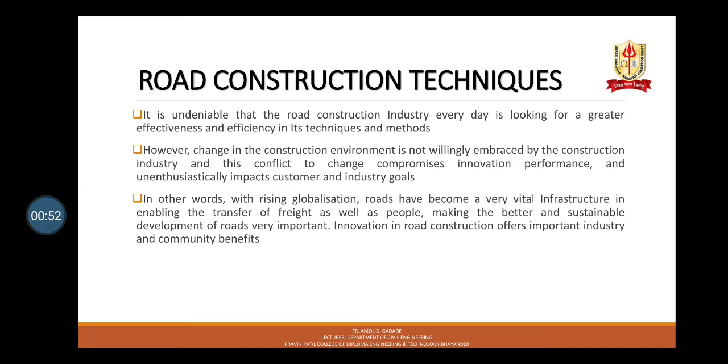Starting with various road technologies, the first one is 3D printing. The idea of 3D printing of structures, although still novel to many, is striding its way towards the root of the construction industry. Today, 3D printers are being developed to process all kinds of construction material and are being tested and tinkered with every day for refinement. Just the thought of an immense reduction in project span and cost with 3D printing technology has been keeping everyone on their toes.

3D printing, also known as additive manufacturing or contour crafting, holds great potential in the industry compared to conventional methods of construction. The printing process, to explain simply, involves feeding relevant data like maps, plans, blueprints, and dimensions in an orderly and predefined way to an automated machine, which in turn produces a precise physical output.

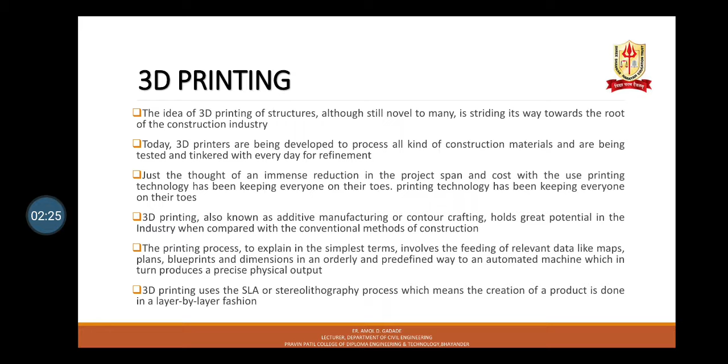3D printing uses the SLA, or stereolithography, process, which means the creation of a product is done in a layer-by-layer fashion. Building elements like walls, beams, and vertical support structures can be 3D printed right at the site, whereas other elements like doors, windows, electrical and plumbing systems are installed with the help of conventional methods.

This is how the 3D printing method works. Process of 3D printing in construction.

A blueprint is prepared with the help of CAD software with all necessary details in it. Since this is going to be the final design and the output is based on it, precision of details is pivotal. The CAD file prepared is then converted into the STL, or standard tessellation language extension, which is compatible with the printer. This extension was first used in stereolithography in the year 1987.

The orientation of the design and the printer is adjusted, just as we do when using a 2D printer. Once set up, the cartridges are filled with the requisite powders and binders for the production of the structure.

The printer, when given the command, starts creating the product, gradually building up the structure one microscopic layer at a time. The thickness of the paste extruded by the nozzle can be varied depending on the structure being printed. A typical layer is around 0.1 mm in thickness.

While the machine is laying the paste, no intrusion is required. The printer simply keeps layering until the job is complete. Periodic checks are all that's required to ensure everything is alright. The time period required for completion can range from several hours to days, depending on the size and complexity of the structure.

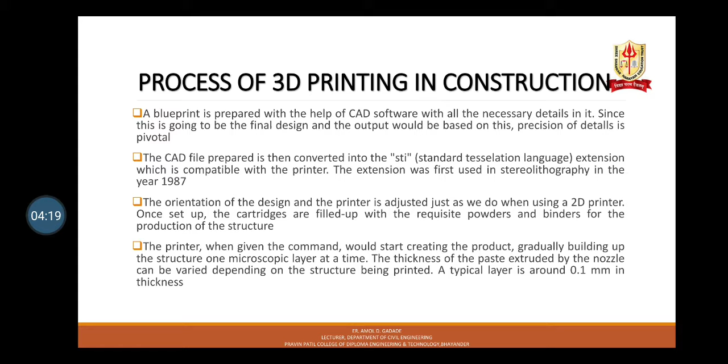Here are some benefits of 3D printing. The very first one is quicker construction. While construction through conventional methods can take months and years to complete a piece of work, 3D printing can wrap up the same piece of work within days.

Second is improved efficiency. Since 3D printing is an additive method, material is added to create the final product, contrary to manufacturing processes such as CNC machining, which are subtractive and leave out a lot of scrap and wastage.

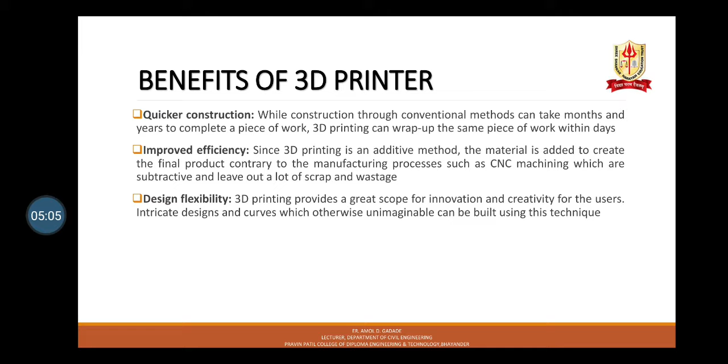Third is design flexibility. 3D printing provides great scope for innovation and creativity for users. Intricate designs and curves, which are otherwise unimaginable, can be built using these techniques.

Another technique is the 3D road printer. Brick roads have been around us for centuries. They are both durable and a treat for the eyes, and easy to produce and reuse. Cement pavers last a very long time and are easy to repair and replace. But nowadays they are difficult to find because building them is an arduous and back-breaking task.

Engineers are always busy finding solutions to problems around the world and strive to decrease the time consumption to complete a task. One such endeavor has resulted in a machinery which is more than just a symbol of great engineering—it is both cool and awesome: the Tiger Stone.

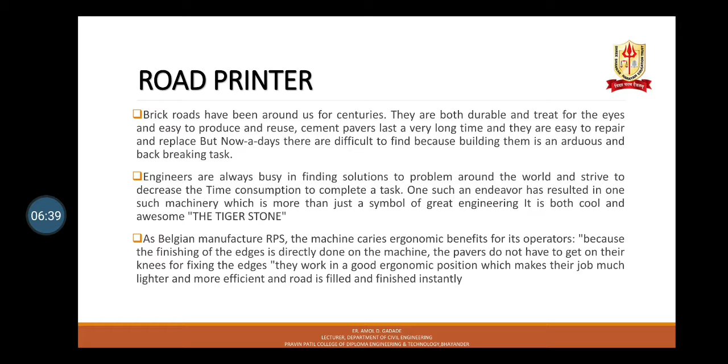As a Belgium-manufactured machine, the Tiger Stone carries an ergonomic benefit for its operators because the finishing of the edges is done directly on the machine. The pavers do not have to get on their knees for fixing the edges. They work in a good ergonomic position, which makes their jobs much lighter and more efficient, and the road is filled and finished instantly.

This is how the road printer machine is working.

Talking about the machine, the Tiger Stone is a 6 meter wide machine that can repave an entire street at once, including edges. The device is amazingly simple to handle - any person can work with it within 5 minutes. Naturally, the stones fall on the road directly into the appropriate pattern. The Tiger Stone is the solution for the heavy work that street pavers in Holland usually have to do manually.

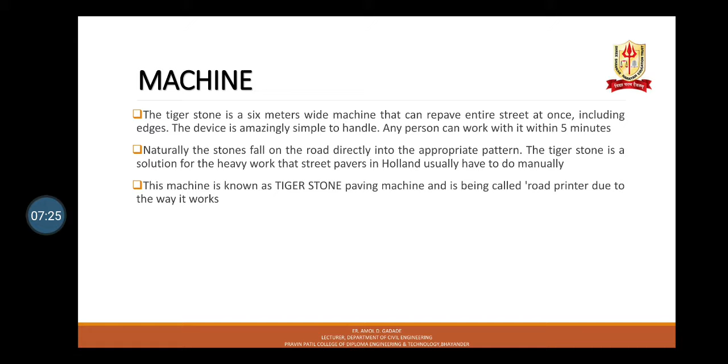This machine is known as the Tiger Stone paving machine and is called a road printer due to the way it works. Talking about procedure, the RPS6 road printer is a divisible paving machine capable of laying bricks for roads.

As the machine rolls backwards, gravity brings the bricks flat to rest on the ground. A front loader fills the brick hopper with loose bricks. The bricklayers stand on the machine and assemble the pattern vertically. The Tiger Stone requires 1 to 3 operators on its platform to provide the machine's pusher slot with loose bricks from the hopper.

The green machine runs entirely on electricity, moving at a speed of 13 feet per minute. Paving stones are lowered smoothly via a curved ramp into place in the correct pattern. It self-steers to keep the road straight and in place.

Then a tamper or steamroller pushes the bricks down to secure them in place. Brick roads are experiencing a revival because they can be reused easily, and filter water without expanding ice.

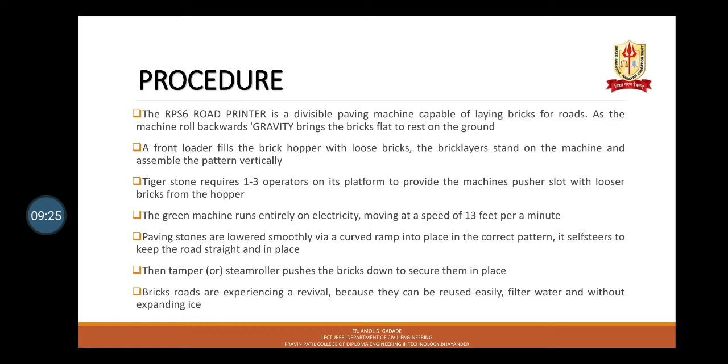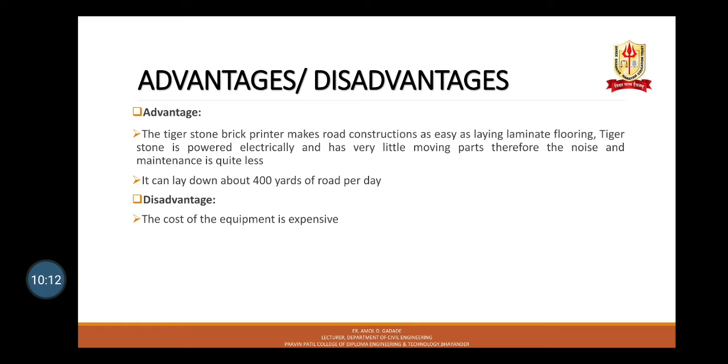Further moving towards smart roads. Smart roads is a term for the number of different ways technologies are incorporated into roads for improving the operation of connected and autonomous vehicles, traffic lights and street lighting, and for monitoring the condition of the road, traffic levels and speed of vehicles. Intelligent transportation system usually refers to the use of information and communication technologies rather than innovation in the construction of roadways, in the field of road transport including infrastructure, vehicles and users, and in traffic management and mobility management, as well as for interfaces with other modes of transport.

Vehicle and highway automation is believed to reduce the risk of accidents, improve safety, increase capacity, reduce fuel consumption, and enhance overall comfort and performance for drivers. There has been enough reason to assume that more automated automobiles relieve the driver from many undesirable routine driving tasks. It has also been known that many car accidents are due to human errors. Therefore, the conclusion has been that with robust automated systems, the chance of car accidents can be reduced.

With the overwhelming increase in the number of vehicles on the road, another concern has been road capacity. Some kinds of automation that would help safety and increase traffic flow have been considered as one potential solution to congested highways. A smoother cruise with an automated system can reduce fuel consumption and engine wear.

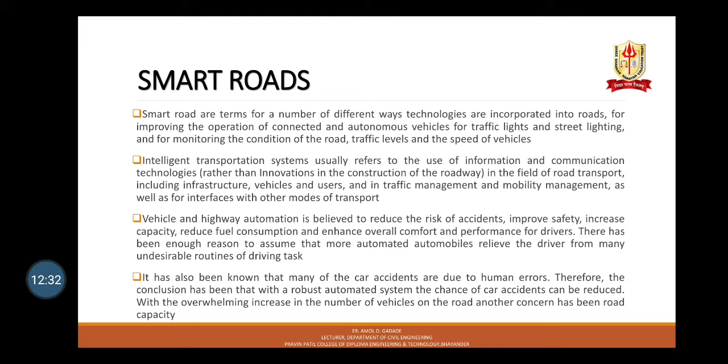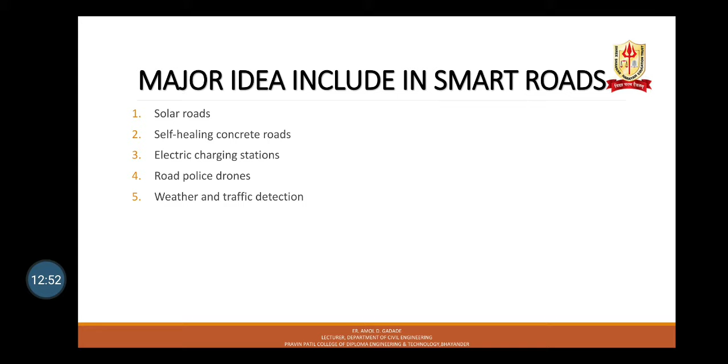Major ideas included in smart roads are solar roads, self-healing concrete roads, electric charging stations, road police drones, and weather and traffic detection. Other functional road panels have been proposed, including panels that could include LED lights for creating dynamic road markings, for example, lane marking or warning messages such as reduce speed.

The panels could include heating elements that produce sufficient energy to clear ice and snow from the roadway. The panels could also include wireless charging technology to recharge the batteries of electric vehicles that drive over the panels.

Now moving towards coastal construction techniques, which is the third part of your chapter. The coastal technologies in the inventory have been structured according to the components of the building: wall technologies, roof technologies, construction systems, flooring, and energy systems.

The inventory includes both alternate materials and technologies that offer benefits in terms of environment and economics while maintaining efficiency and quality parameters. The technologies have been chosen based on key parameters: reduced embodied energy and fuel consumption, hence reduced carbon emission; reduced environmental damage through optimal resource use and waste utilization; better thermal efficiency and comfort; resistance to natural disaster; alignment to local production in terms of material and skill availability; and cost efficiency.

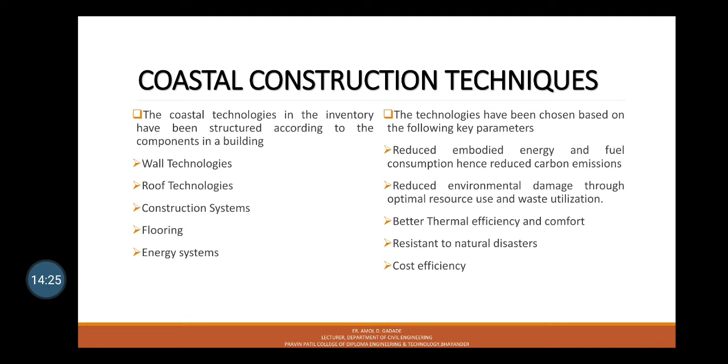Moving further to soundproofing walls. For soundproof and fireproof inner walls of a type comprising two parallel reinforcing metal plates mechanically interconnected to form an interspace between them, with a filler of insulating material consisting essentially of rock wool-like material arranged in the interspace.

At least one continuous diaphragm extends parallel to the reinforcing metal plates and divides the filler into parallel layers. The diaphragm comprises a plate of solid refractory material having projecting edges beyond the filler. The reinforcing metal plates have folded edges constituting a section member-like portion thereof. The projecting edges engage with the folded edges of the metal plates, which are seam folded and hold the metal plates together.

Soundproofing material can be applied to a wall under construction or added to an existing wall post-construction. There are several ways to soundproof a wall. Improvements in the soundproofing industry have resulted in products that are more effective and cost less than traditional wall soundproofing methods. In almost every way, the modern drywall-over-studs wall is better than its timber, masonry, plaster, and lath predecessors—it is fast and easy to build, lightweight, and uses the most inexpensive materials. But when it comes to stopping sound, the modern wall is a flop.

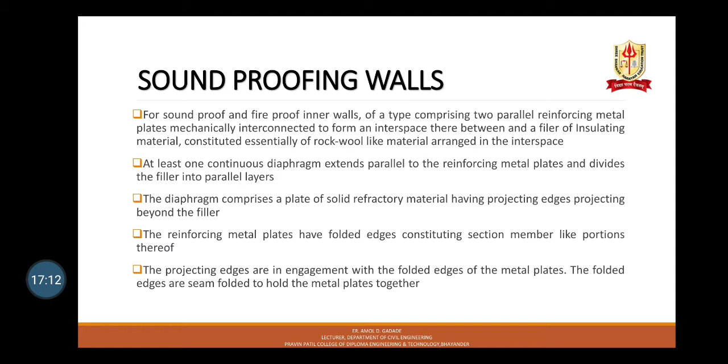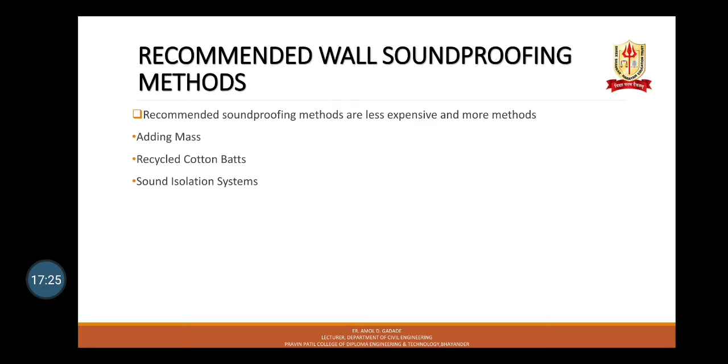This is how soundproofing walls are constructed. Here are some recommended walls and soundproofing methods: the first one is adding mass, the second one is recycled cotton batts, and the third one is sound isolation system.

And these are some traditional and less effective methods which have been used since ancient times: staggered stud wall, double wall, resilient channel system, fiberglass batts, and expanded foam sprays.

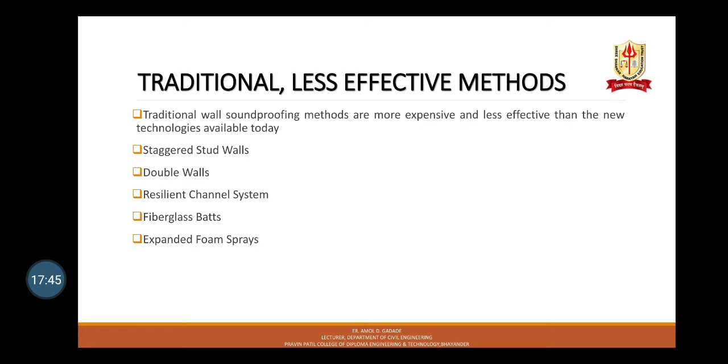The next coastal construction technique is water resistant roof. Waterproofing requires you to block moisture out by using techniques to seal your roof against water. If you have a low slope roof, or one with many architectural elements such as multiple gables and valleys, waterproofing may be necessary. A roof with a low slope may not shed water efficiently and may experience pooled or standing water for a period of time.

Water will always seek to run downward. If there is an opening, it will get through and create water damage to anything underneath the roof, from the decking and insulation to the building contents. If water gets trapped in the end lap or the purlin, it can cause premature corrosion in the secondary framing members of the panel.

A roof with a slope of less than 3:12 is generally considered to have a low slope. If there are panels or areas of the roof that are slightly lower than the surrounding material, it will hold standing water. Other places water sneaks in are through exposed fasteners and nesting panels, which may experience weakening, drawing water underneath the edges.

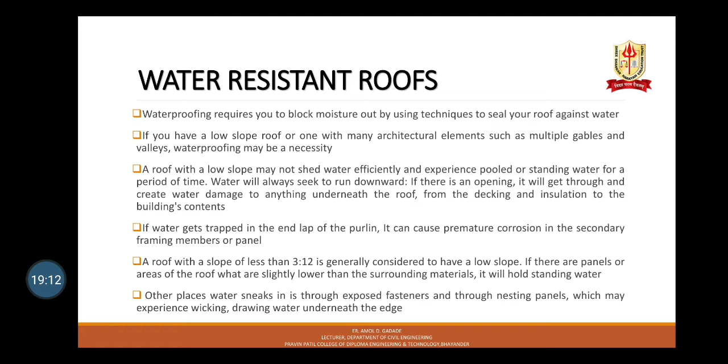This is how water resistant roofs are made. Waterproofing is best approached by multiple aspects of the roof. The most water resistant roof is a standing seam roof, with seams at least 2 inches high, ensuring the roof can move with thermal expansion and contraction without damage. Mechanical seaming of the joints between panels eliminates areas where water may enter between panels. Do not use exposed fasteners; opt for concealed fasteners for the entire roof instead.

Fasteners do not always last the life of the roof and become a primary entry point of moisture. Use foam and metal closures along with manufacturer approved sealant to ensure watertight fit between panels at end laps and around fasteners. Do not allow the sealant to be exposed to the outside environment, as it will shorten the life of the material. Include proper ventilation to protect against condensation on the underside of the metal panel system.

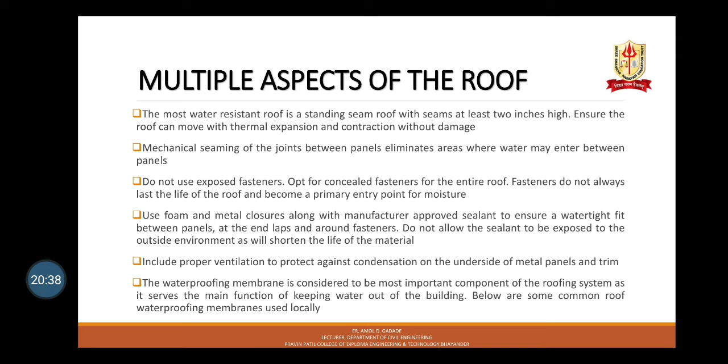The waterproofing membrane is considered the most important component of the roofing system, as it serves the main function of keeping water out of the building. Below are some common roof waterproofing membranes.

Liquid applied membranes, and second, preformed sheet membranes. Liquid applied membranes are applied on site in liquid form, which is allowed to set and form into a water impermeable membrane. Bituminous based and polymeric based membranes can be applied cold, while those containing coal tar are usually applied when heated. Liquid applied membranes are seamless, semi-flexible, easy to apply, detail, maintain and repair. However, careful supervision and control during application is needed, particularly in ensuring proper curing, consistent thickness and uniform application.

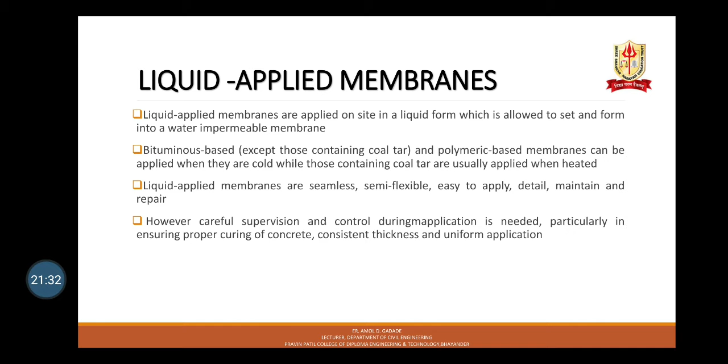Second, preformed sheet membranes. One type is the polymer modified bitumen membrane, applied by heat or attached with an adhesive. This blended or modified asphaltic product is bonded to a high strength fabric of polyester or fiberglass and produced into rolls. They have elongation and recovery properties, making them suitable to protect against stresses created by wind, temperature fluctuations, and normal structural expansion and contraction of the building.

Another type of preformed membrane is made up of polyvinyl chloride, that is PVC. Although PVC is a hard resin, it is modified with an addition of plasticizers to make it more supple and pliable for use as a roofing membrane.

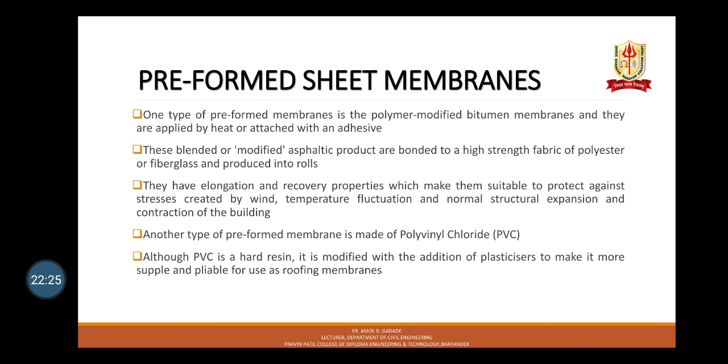The next modern technique is high performance doors and windows. High performance doors are automatic doors used for fast access between internal and external areas of the building. Prime high performance doors are designed and factory made with German collaboration, using state of the art and resourceful engineering technology for frequent use in high traffic areas, with opening speeds up to 3 meters per second. The high opening speed reduces time taken in the movement of material, thus hastening the logistic process.

Our team of skilled engineers visited the site and recommended the most suitable rapid door to the client. Rapid doors are manufactured and installed keeping in mind international standards.

Many manufacturing industries nowadays need a controlled environment in which to limit the amount of dirt and dust in the manufacturing premises. Medical instrument manufacturers, electronics and computer manufacturers, food industry, pharmaceutical industry, and some military applications are but a few examples that have strict requirements for maintaining a dust-free environment.

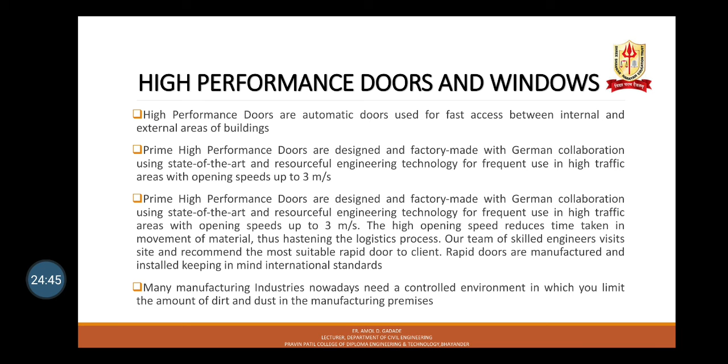The present invention discloses a composite profile for thermal bridges, solid web steel doors and windows, and a manufacturing method relating to the steel door and window profile. The profile provided by the invention consists of a solid web steel profile made from standard steel members and a non-metallic heat insulation strip.

Here are some high performance windows: vacuum insulated glazing, dynamic windows, thin glass triple center layer, center of glass deflection, operating hardware, highly insulating commercial framing, gas distillation, and energy recovery based facade ventilation system.

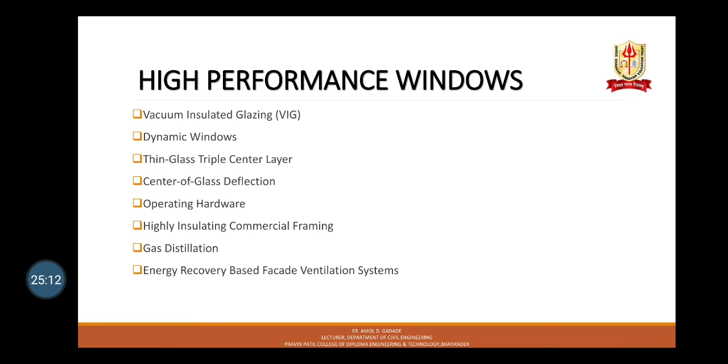Next is air and moisture barrier. The job of the moisture barrier is to prevent moisture diffusion, and the job of the air barrier is to stop air leakage through differences in air pressure. A wall system should have one moisture barrier but can have many air barriers. A moisture barrier can act as a very effective air barrier, but an air barrier does not always stop moisture from diffusing. A wool sweater, for example, is a good choice for natural insulation and will keep you warm when there is no air movement, but will allow the wind to blow right through it.

A wool sweater with a raincoat will keep you warm but holds moisture inside and soaks your insulation. A wool sweater with a windbreaker will keep you warm, stop the wind from stealing your heat, yet allow moisture to diffuse through it.

In order to prevent condensation from forming, a moisture barrier should be placed on the warm side of the insulation, to stop warm, moist air from condensing on a cold surface inside your wall. In a cold climate like Canada, for most of the year, the moisture barrier should be on the inside of the insulation. In a hot climate like the southern US, for example, the moisture barrier should be installed on the outside of the insulation, especially where air conditioning is involved, to prevent condensation and mold.